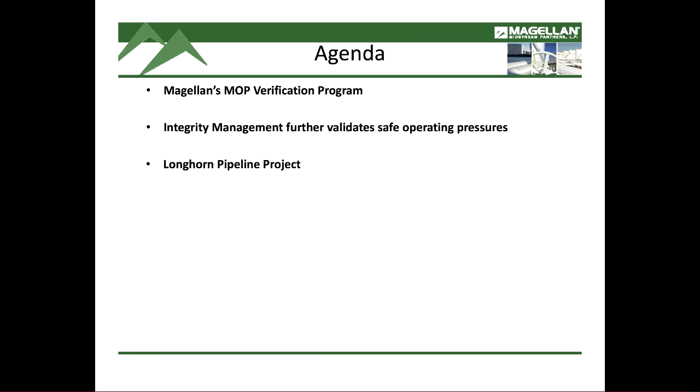This was a project where we had an established MOP, but we worked through conducting some additional verification steps to validate that the MOP we had was accurate. So, MOP verification - if you're a liquid operator in the room, you know MOP starts with 49 CFR 195.406.

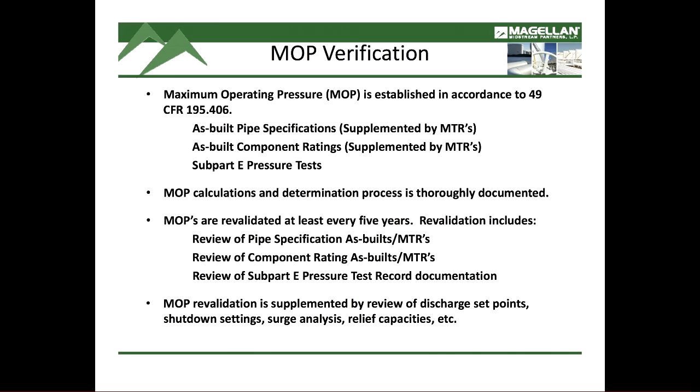For Magellan, years ago when we started consolidating our MOPs, it really started with our as-built documentation. So what we did is we started going through all of our records and pulling out the unique vintages of pipe that we had. By vintage, I mean each combination of wall thickness, grade, seam type, manufacturer, and documenting that in a concise form. All of our MOPs, we started calculating on one form, so we had a quick, concise record of all the pipe that was a part of that pipeline system.

And then, of course, we supplemented that with components - where are they at, what are they rated for, what type of component it is. And all that was rolled up into what ultimately became our compliance subpart E pressure test.

For us at Magellan, the pressure test is significant in terms of establishing that MOP, because that's the one verification that really touches every foot of that pipe, as opposed to maybe some tighter statistical sampling that you do. So the pressure test is really the driver for how we establish MOP. I think it's really critical, when you've calculated this MOP, that documentation matters.

Because it rolls out into so many other important factors within your programs. It's not just where you set your MOP, but it's also your operating pressures as far as discharge, shutdown, your assumptions that go into your surge analysis, your relief set points, and even your MOP alarms that you're using in your SCADA system, so you can ensure that you're operating below the allowable limits.

So we want to be able to step back - let's say you go to that alarm that's in your SCADA system, and you want to know how you derived it - you want to be able to go back and pull that documentation very quickly and have the information that supports that.

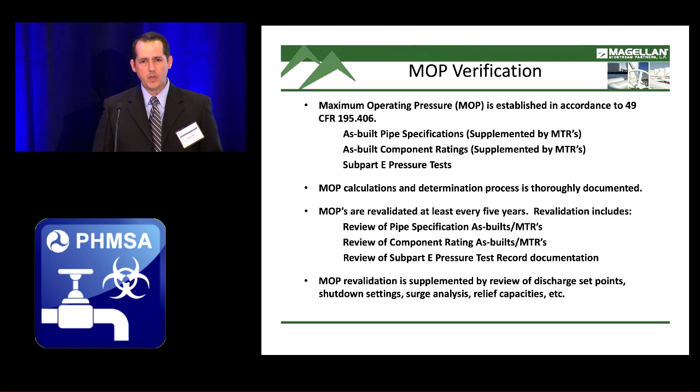You may choose to do a spike test, and that's certainly valid for certain threats. There's also a lot of questions, I think, that we talked about earlier on spike tests that we still do have to address and understand.

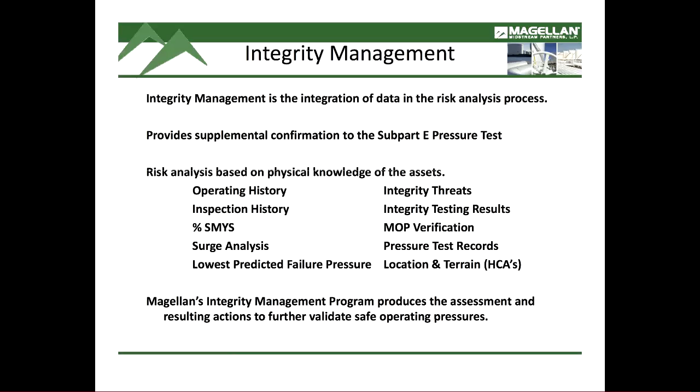Another thing you may do is adjust your MOP, or adjust your discharge pressure. One example that could impact the threat of a release at a pressure lower than your MOP is to look at your relief set points. Do you have them set at, if you have an MOP, do you have them set at 1400, or do you have them set at 600, recognizing that you normally operate at 500? So how can you influence the overall risk profile of that pipeline?

There's a lot of different decisions that come out of that integrity management program that takes a lot of integration of good quality data. And it does still come back to data, because you're only as good as the data you have. So you want to be able to integrate that and have it accessible and make the decisions you want to execute on your pipeline after that.

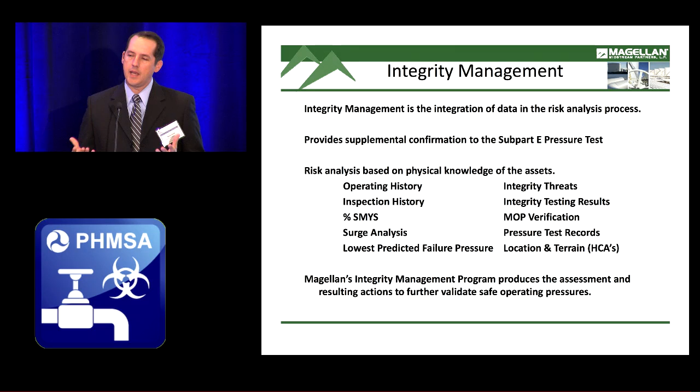So let's talk about our Longhorn Pipeline project. This was a 500-mile crude project going from Crane, Texas to Houston, Texas. It is a 1950s vintage asset, so given that, as you might imagine, not every MTR was readily accessible. But what we did have is really good as-built documentation on it, and we also had a fairly recent pressure test. It was a 1.25 MOP, 8-hour continuous pressure test.

Now this pipeline had a very specific permit approval process that went along with it, and we had very good, productive, collaborative efforts with PHMSA navigating what that approval process was going to be. Fortunately for us, the pipeline was already displaced as part of the project, but what we did is we went through all the different vintages of the pipe, and where we didn't have MTRs to support the as-built record, we went and did a series of cutouts.

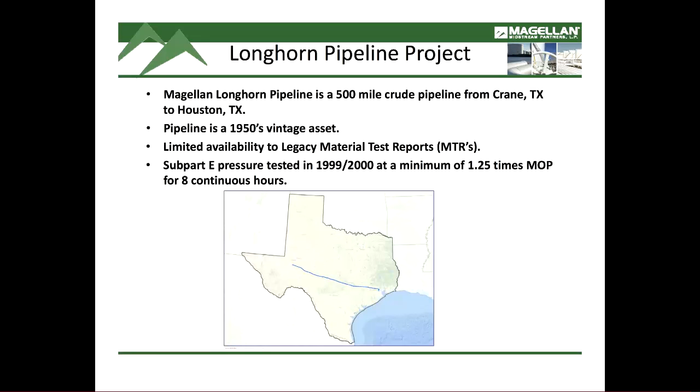Those cutouts we sent in for destructive testing, and we supplemented the destructive testing by doing some non-destructive testing on those exact same cutouts. The objective of doing the non-destructive testing is over time to continue to build a statistical sample. You obviously start with a very small statistical sample as far as cutouts go, and you're building towards that to continue to validate what your pressure test has told you.

Ultimately, the MOP was established by the pressure test, but we want to make sure that the non-destructive testing or the destructive testing validated that. And the end result is that it was. The non-destructive testing and the destructive testing results were very close to each other, probably about 10% difference when you're looking at yield strength and tensile strength.

And you know, what that allowed us to do as we set up long-term additional non-destructive testing is have high confidence that it was going to be fairly accurate. Part of the permit approval process was committing to continue non-destructive testing on 50% of our ILI features. As we've progressed, it's been a couple years now, and all the testing we've done has continued to validate that our as-built records were correct, and that our MOP and the assumptions that went into our MOP were valid.

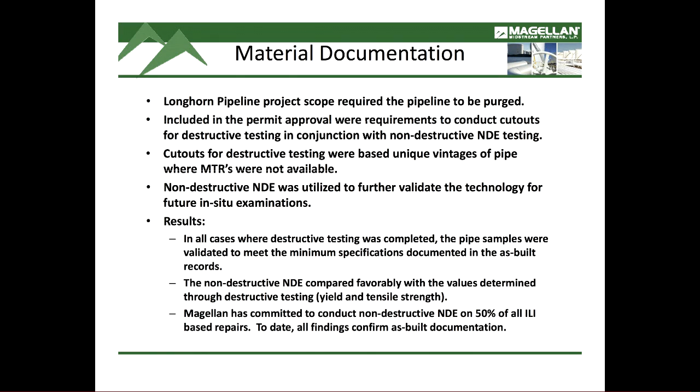So just quick wrap up, for us, the hydro test is still where we start in our MOP determination. It's a verification that covers the entire asset. The second step is that continuous review of your as-built records. Go back through those, look for data changes that may have happened, validate if you've had a management change that's occurred between the last time you validated your MOP, and make sure that's been appropriately accounted for.

And then I think where a lot of us operators are today is continuing to research the MTR records. If you're looking for what you don't know, part of digging into those records is finding the MTRs, which is where we're at. But there's also another opportunity, whether you have MTRs or not, which is to take advantage of the cutouts you're already doing.

If you're doing a relocation or a tie-in or some project where you're going to be cutting out pipe, it's a great opportunity to continue to build your statistical sampling of that specific asset and validate the records you already have. Then you can continue to supplement your MOP verification with your IMP.

Look at where you're operating, look at how you set your MOP. I'd say even take that further to relief set points, your surge analysis assumptions, and determine if you want to operate lower. There's a lot of different ways you can approach integrity management. Like I said, you may decide that a spike test is the best option. It really just depends on the asset.

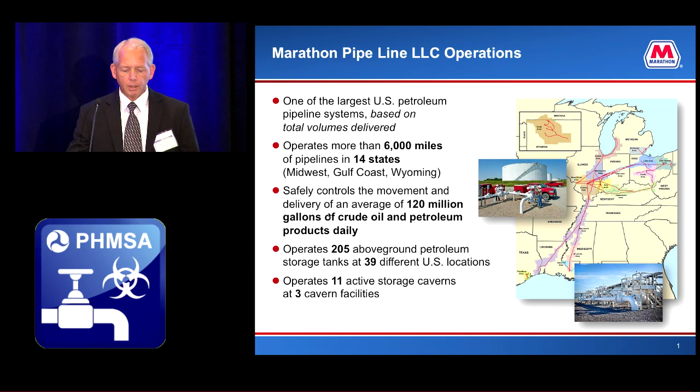First from PHMSA, I found their mission and vision statement on the website. Our mission is to protect people and the environment from the risks of hazardous materials transportation, and our vision is that no harm results from hazardous material transportation. Pretty hard to take exception to that. I think that's well stated.

Now let's take a look at the shared pipeline safety principles that are documented in the 2015 API AOPL Annual Liquids Pipeline Safety Performance Report and Strategic Plan.

Zero incidents. We've heard that several times today, and it stands prominently at the top. Pipeline operators do have the mindset that every incident is preventable, and we work very hard each and every day to try to achieve that.

Organization-wide commitment to safety. It's not just the leaders at the top of our organizations. It's a culture that needs to permeate all the way down to the frontline worker, and where we have a continuous improvement mindset that resonates throughout the organization.

Learning from experience. Operators, of course, learn from their own experiences, but we actively share lessons learned amongst ourselves, and we have a variety of forums that we have in place to accomplish that. As we continue to drive our incidents lower and lower, we need to look to the pool of operators to see what's learning, why are these incidents causing, get to the root cause. That's where we can really learn and benefit from our sharing.

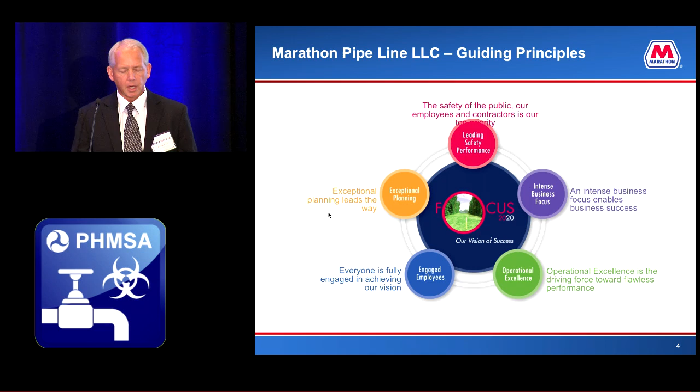So I just wanted to go through those to reinforce the point that there is clear alignment of our objectives, and that PHMSA, the hazardous liquid pipeline industry, Marathon Pipe Line right there with it, many of my colleagues in the audience, I'm sure, would stand tall with this as well. We have very similar aspirations, but I think what we're here to talk about is how does the proposed IVP effectively help achieve them. So with that, I'll provide some comments on various elements of the proposed IVP, starting with spike pressure testing.

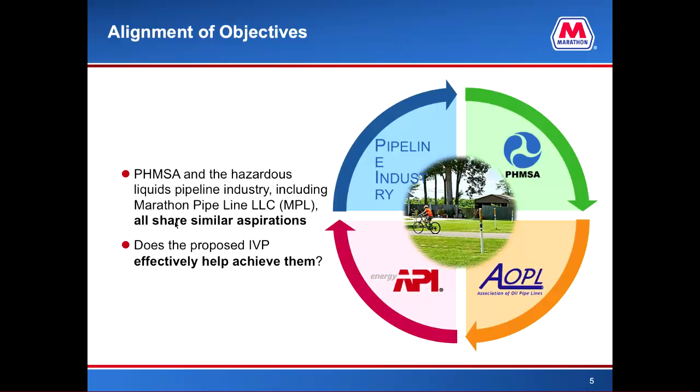So what is it? Spike pressure testing is an integrity assessment method to identify and eliminate a very particular set of critical defects, those that might be growing through pressure cyclic fatigue. It's not a tool for establishing or verifying maximum operating pressure. We already have very clear guidance in the code on how to establish or verify MOP.

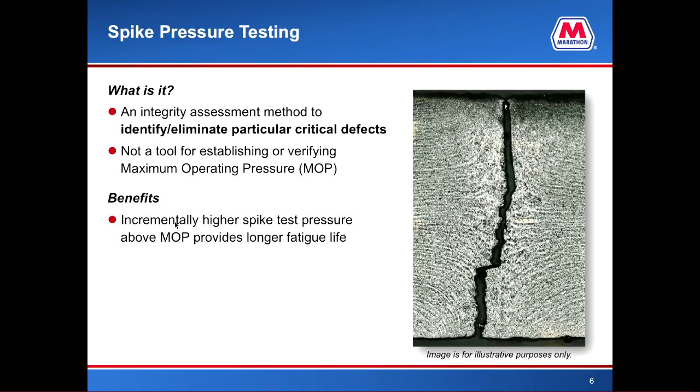Operators design spike tests with an incrementally higher pressure above their intended MOP so they have a fatigue life to work within. It's very dependent upon the operating conditions of a pipeline. If there are many, many pressure cycles, an operator would choose a higher spike test pressure to have a longer fatigue life. On the other hand, if the line was operating with very small or a few cycles, the pressure wouldn't need to be set as high. So the dependency of testing pressure at a fixed level is not really relevant. It's more thoughtful as to what fatigue life that you are targeting.

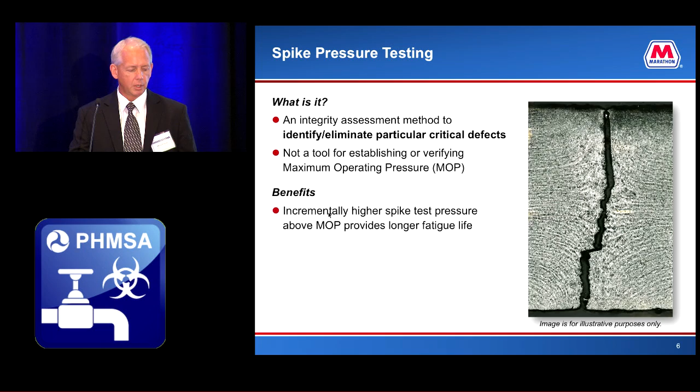There are also consequences with spike testing: damage. Hydro tests cause damage. It's a destructive test, and we're failing pieces of pipe, and we are also causing what might otherwise be stable anomalies to grow and then potentially start fatiguing. We've observed through successive pressure testing, looking at test failures under the microscope, where you can see tearing occurring during successive hydro tests - tearing, a little bit of fatiguing, tearing, a little bit of fatiguing - and what we're ultimately causing are these anomalies to fail sooner than what they would otherwise. So we've got to consider that as part of the equation here, that this test has its place, but it also has some detriment, and that we need to weigh that.

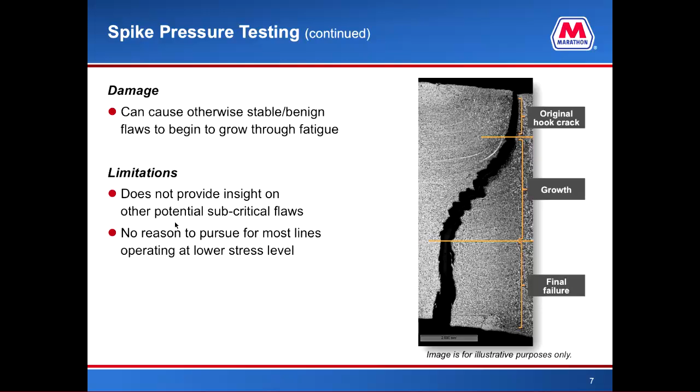Other limitations include the fact that this assessment methodology doesn't provide insight into what other anomalies might be on that particular pipeline. It will cause anomalies that have grown to a critical size to fail during the test, but there will be others that survive the test that an operator will not be able to know through this particular means. So that's another limitation.

There's really no technically defendable reason to pursue a spike test for most lines that are operating at low stress levels. If lines don't have anomalies that are fatiguing, or we have fatigue lives that are dozens, if not hundreds of years into the future, there's really no need to apply this type of assessment method to those.

It has also been suggested that operators design spike tests to pressures of 90, 100, or even a higher percentage of the specified minimum yield strength of the pipe.

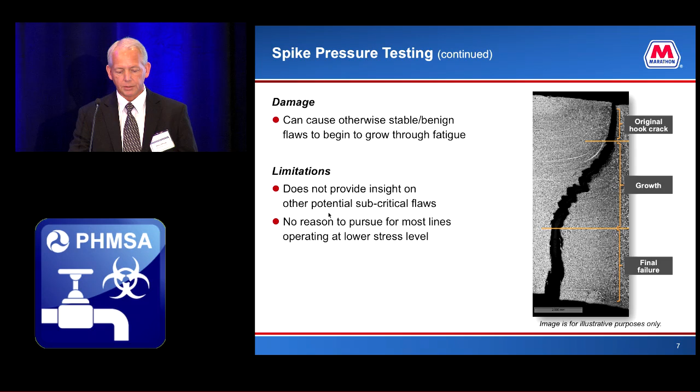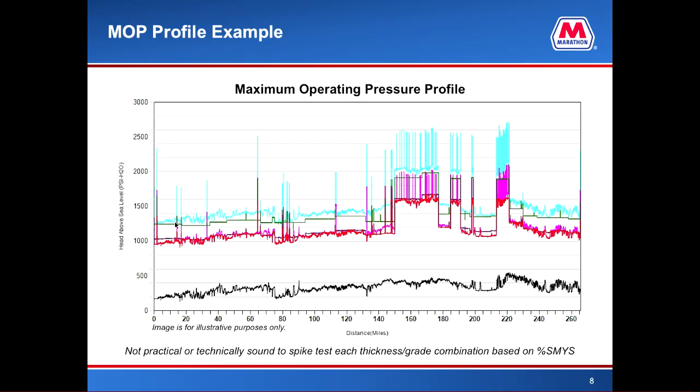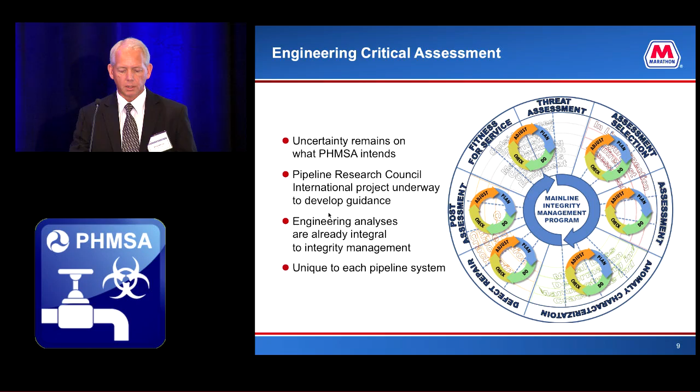graphically depicts typical steps through that process where an operator would perform a threat assessment. What do I know about my pipe? What don't I know? I select an assessment methodology to best identify those particular threats. I perform the assessment, I characterize the anomalies, I repair the defects, I evaluate post-assessment what I've learned, what I might need to change. I determine what my fitness for service is, and then I start again.

And in each one of those processes, you see a little plan, do, check, adjust wheel. Each time we perform an assessment, we learn. We take that learning and apply it and improve our processes, and we help try to find all the many blind spots that might be out there and get better each time.

The other point here is that these analyses that we perform are very unique to a given pipeline system. It's not something that you can broadly apply an algorithm to and fit all the needs for a given pipeline system. It's very custom, very tailor fit.

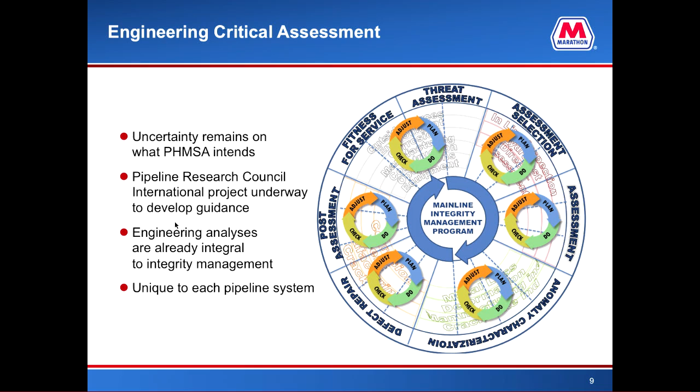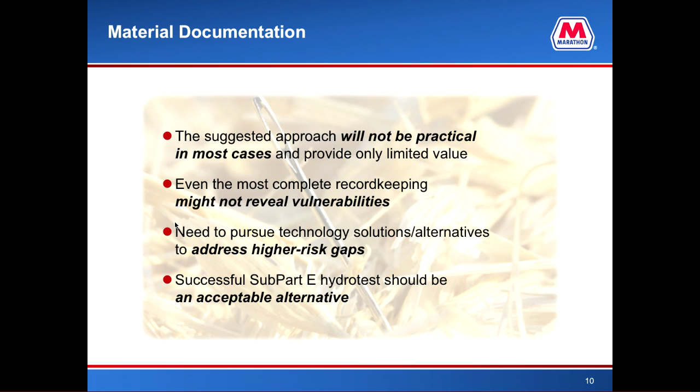So the area of focus really needs to be placed on technology solutions. Where we have gaps or weaknesses in this area, we really need to figure out what technical R&D we can perform to fill in those gaps. In fact, there are a number of projects underway to help in that regard.

And certainly a successful Subpart E hydro test, if there's a documented, thoroughly completed Subpart E hydro test, that should be an acceptable alternative to going through this exercise.

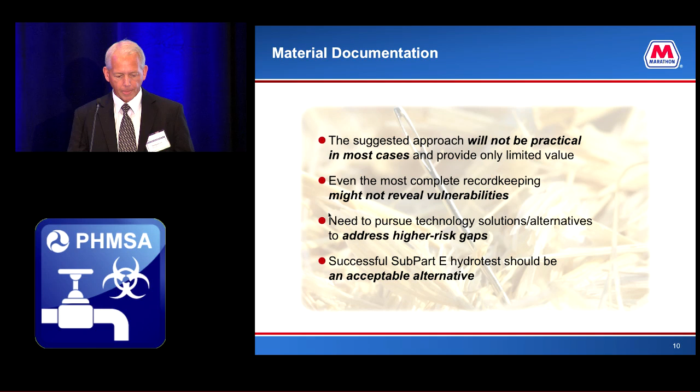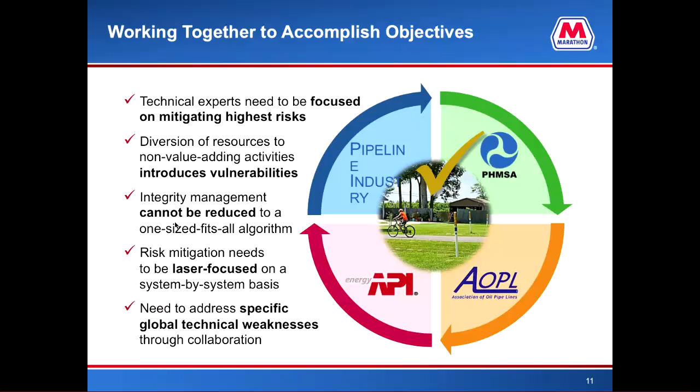Also, as I mentioned, integrity management is a complex undertaking. There's a fair amount of high-intensity engineering done on each and every segment, and we can't reduce that to a one-size-fits-all algorithm and expect it to work effectively every time.

Risk mitigation, which is really what we're trying to accomplish, needs to be laser-focused on a system-by-system basis.

And finally, where we might have global technical weaknesses within integrity management, let's work together, find what those weaknesses are, and then tailor-fit solutions—not in a shotgun manner trying to hit everything loosely, but let's laser focus our energy, find where we have weaknesses, collaborate together, and shoot towards the objectives we all aspire for.

Thank you. Questions?

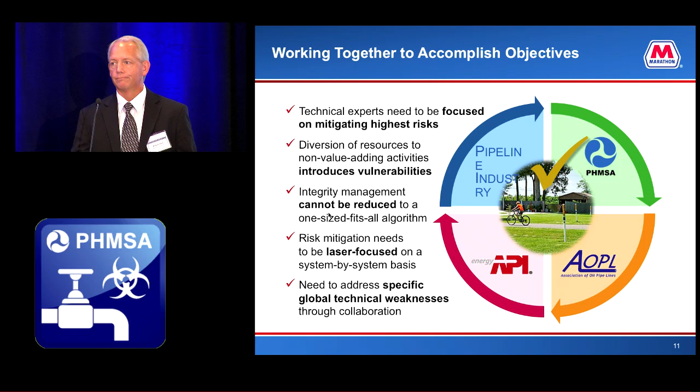Thanks, Philip. Next up is Jake. Questions already? You're done? Thanks, Jake. No. I'll let Jake expand on his background, but I know he's been around—certainly in my 8 years being with the industry and a number of operators. I think you've helped us in some of our prior workshops, so definitely active in PRCI.

So, here's Jake. So we've heard a lot today about what's in the black box. What is ECA? What are the guidelines? What are we getting ourselves into?

Speaking for a number of operators I've talked to, when we saw the first IVP charts, we asked ourselves the same question. We came together under PRCI and said, PHMSA has given us an opportunity to get ahead of this and offer some technical suggestions, some guidelines, to start putting a framework around this ECA process.

So what I'd like to do today is share with you what the PRCI project is about, where we're headed with developing these guidelines, and try to walk through some of the things that we think are important in terms of IVP and ECA, and perhaps show an example or two of how we think this might play out.

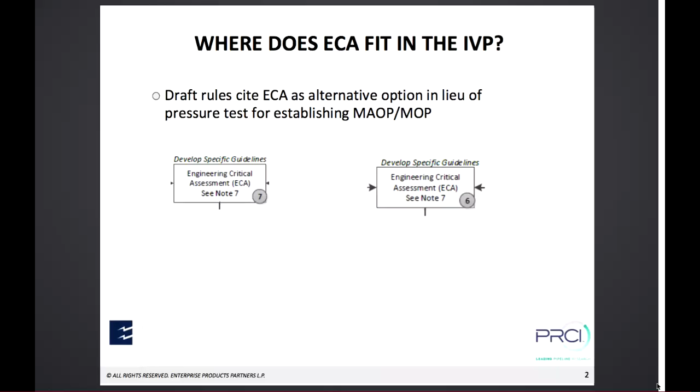But as we've all asked today, what exactly do we mean? A couple of drivers for the ECA development, particularly from the PRCI standpoint.

The industry recognizes that there are a lot of line segments out there, both in the gas and liquid industry, where it's going to be very difficult to meet IVP requirements for test records and for material documentation.

A lot of these pipelines predate any kind of regulatory code, so whether they were built to ASME standards or company standards, they may have some of these records, but not all.

We also recognize that technology is evolving pretty rapidly, particularly in ditch evaluation techniques. ILI technology is also evolving, and we want to try to leverage that in our ECA guidelines.

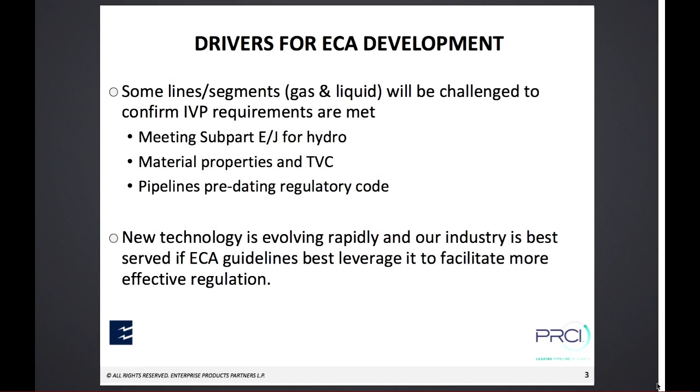So what exactly is an ECA, and what is it for? The purpose is to determine if a piece of equipment or structure is sound enough to meet the service requirements for what it is intended.

This is a pretty general definition, I believe it comes from ASME. API 1104 also has a similar definition: an analysis based on fracture mechanics principles of whether or not a given flaw is safe from brittle fracture, fatigue, creep, or plastic collapse under specific loading conditions. Now, as you all know, 1104 is a standard for girth welding.

So in this definition, the context is girth weld flaws. And of course, the IVP flow charts also offer some description of what they mean.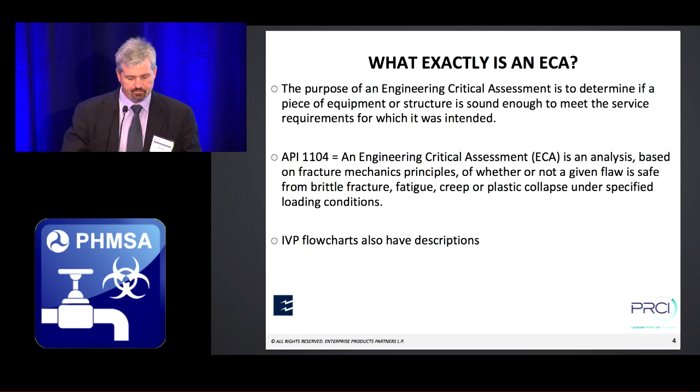The project's goal is to develop these guidelines. We want them to be flexible and practical. They need to be based on integrity principles and integrity best practices. We intend for them to be suitable for both hazardous liquids and natural gas.

We do look at this as a one-time exercise to support MOP, MAOP. When I reflect on some of the comments I heard this morning about the reoccurring nature of MOP justification, we see a blurring of the lines between the integrity verification process and integrity management program. A lot of what was talked about this morning regarding fatigue life calculation, reassessment interval determination, and fitness for purpose—that's the blocking and tackling of integrity management.

The existing integrity management programs are built around that. So we've got to figure out, and it's important to us as an industry, to understand what the difference is. If what we really are saying is that integrity management regulations aren't adequate, then let's say that. Let's come out and say we need to change integrity management program regulations.

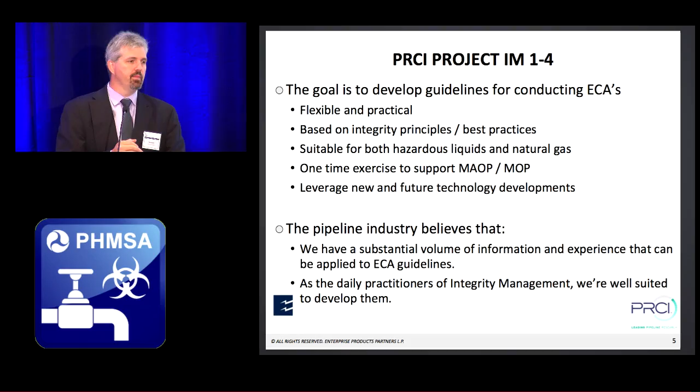Speaking for myself, not the whole PRCI team, I wonder if, rather than ECA, we shouldn't have tried to change IVP to some sort of MOP verification process—just so we're clear that we believe this to be a one-time exercise based on integrity management science, kept distinct from integrity management programs. I'll talk more about that as we go. It was kind of a revelation for me this morning, and I want to get it out there for discussion because it's that important.

We know it's the right thing to do, but it's important that we're clear on what the requirements are, so as Phil alluded to, we can focus our experts where they need to be and properly respond to these requirements. The pipeline industry believes we have a substantial volume of knowledge and experience from our integrity management programs that we can apply to an ECA process. They're closely linked, and as the practitioners of integrity management, we feel we're the best ones to come up with a guideline or framework of guidelines.

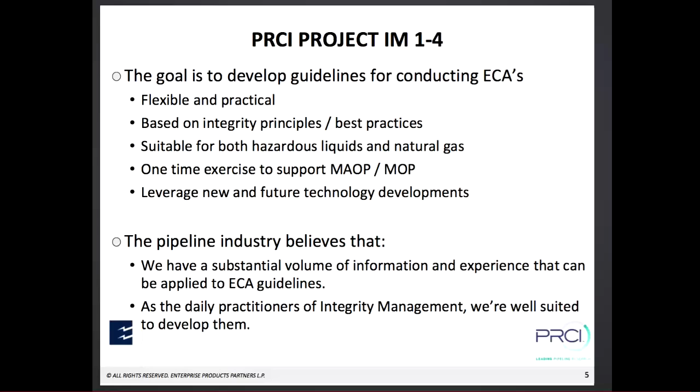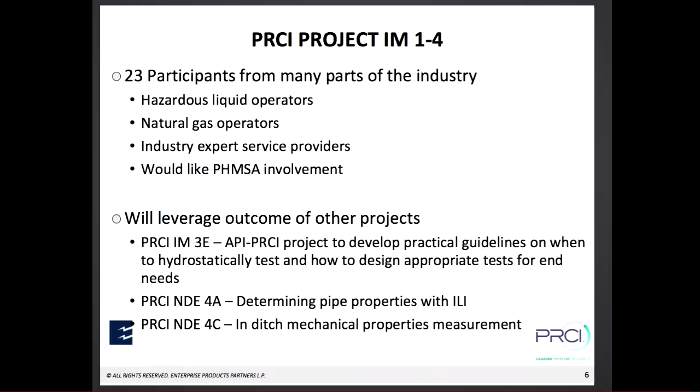The project has 23 participants. We have hazardous liquid operators, natural gas operators, and some industry experts on the team—it's not just operators. We welcome Steve's comments from this morning; they're very interested in what this project comes up with. We'd love their involvement and feedback as we go—can we fully understand and hit the mark on what they want for IVP?

We plan on leveraging several other PRCI projects. There's a project underway right now to develop guidelines for when to do hydrostatic testing and to what level, based on appropriate need. There are also several projects dealing with in-ditch materials characterization, and a project on how to connect the dots of all the in-ditch work with ILI data. We think—not to jump ahead of something I want to cover later—that's an opportunity for this PRCI project: to put these things together and consider what that means in the context of material documentation.

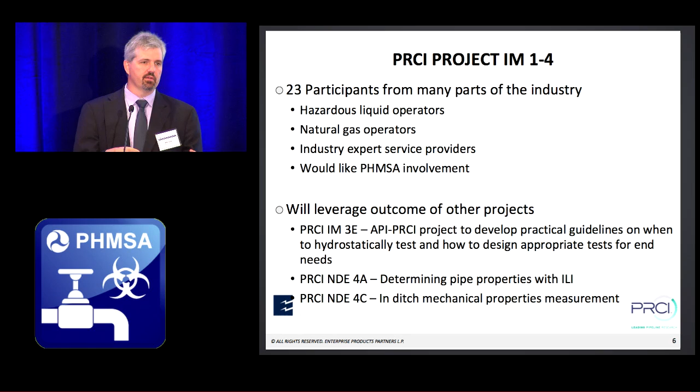I mentioned this earlier—what's in a name, ECA versus MVA. Right now the project team likes the phrase MVA, MOP MAOP verification analysis, because it's what we expect the focus to be: we have less than perfect test records, less than perfect material documentation. What can we do to make up that gap and show that our pipelines can support these operating pressures?

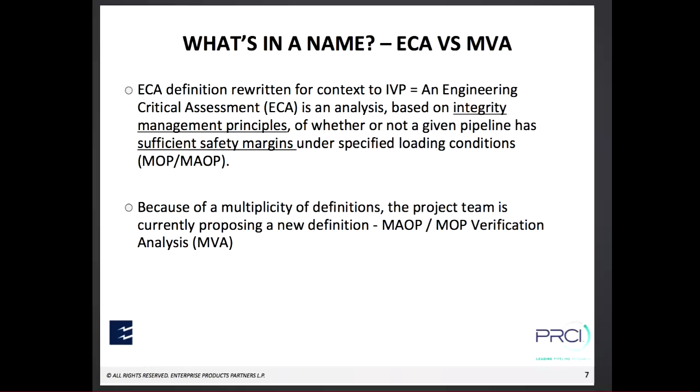We offer up a definition of ECA or MVA as an engineering critical assessment based on integrity management principles, whether or not a pipeline has sufficient safety margins under specified loading conditions. By leveraging integrity management principles, we think we can make up for not having a pressure test calibration certificate, or maybe not even having a test station location. There are things we can do from an integrity standpoint to make an equivalent safety margin to what that piece of paper would give us. I'll share an example of that later.

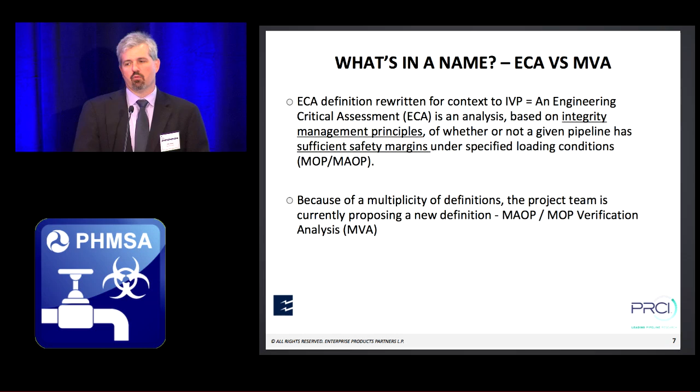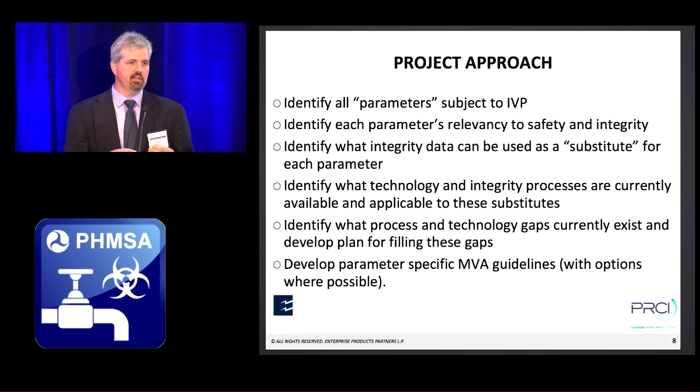Rough outline of our approach. We're calling them parameters in this presentation, meaning all the record and material record documentation requirements. Each one of those is a parameter in our language that we want to address somehow. We want to take a look at each one of those: what are the relevancy for safety and integrity? More on that in a minute.

What data is out there that we can use that's applicable to each one of these parameters? What existing technologies out there can we also use? What existing processes can be used? What kind of gaps are out there for technology and process? And then finally, we want to come up with a matrix or a table that says, if this is the thing you're missing, here are all your options to demonstrate that the pipe can be just as safe.

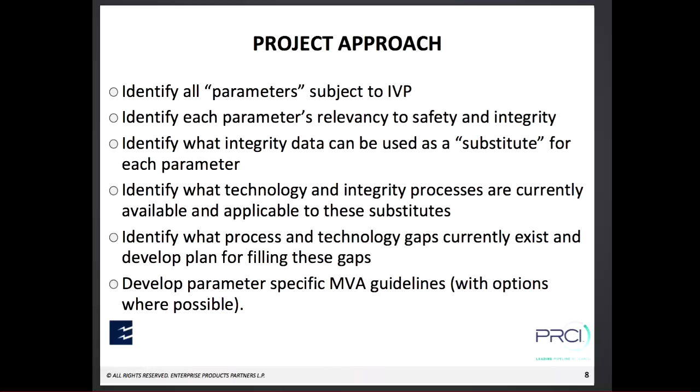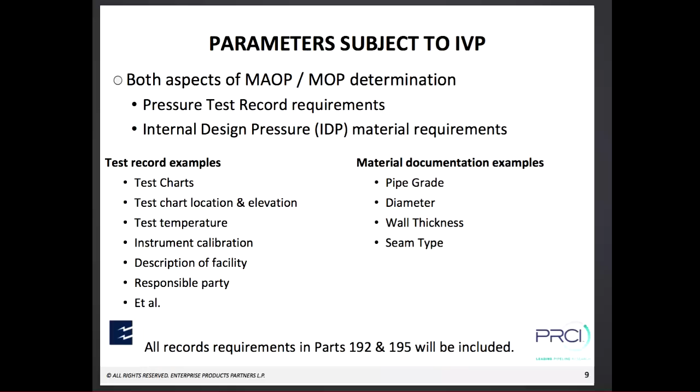As I mentioned earlier, we want to tackle pressure test record gaps, and what I've always thought of as internal design pressure material requirements: wall thickness, grade, seam type — the equation in the design section of the code that says here's what you can operate to. Some examples of what we mean are all the things listed discretely in the codes, and we intend to try to address every one of them.

Relevance to safety and integrity. We've heard some authors say one size doesn't fit all on some of these record gaps, and whether they're relevant or not kind of depends on what records you do have and the quality of the critical ones. If I have a really good test pressure chart with clear documentation, but it might not be signed by anyone, is that a real safety issue?

It's also dependent on the quality and quantity of supplemental records. Maybe I'm missing where the test stations were, but I have a watering plan, a dewatering plan, and a bunch of construction records that you can lay out in a story to say this is how the pipeline got tested — we had a section start here and a section start here, so it's probably pretty logical that would have been where the test station was. Supplemental records can build this story, and we want to see if there's an opportunity to lay down some standards or guidelines where you can use those.

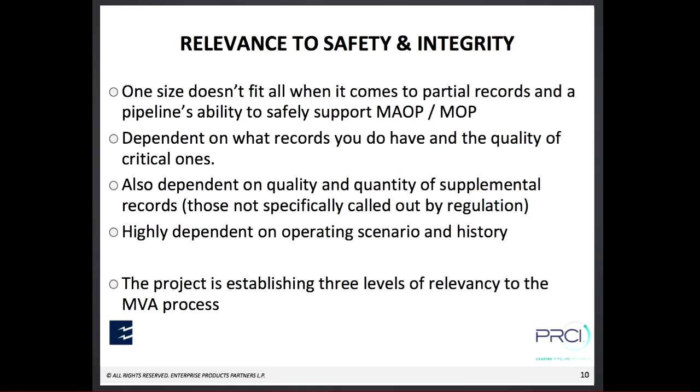A lot of this is going to be highly dependent on the operator's history and operating scenario. Phil touched on this earlier — a lot of us have pipelines that run at low pressure, 150 class systems, where the pipe's good for 1,000, 2,000 pounds because it's small diameter. Some of this has been in the ground and operating for 50, 70, in Enterprise's case over 100 years. So we've got to take that into consideration when we say we don't have a hydrostatic test record from 1924 — we've got to do something. These are important things to take into consideration.

We've established three levels. There are things that are high relevance — these are things you absolutely have to have. You need to know the pipe diameter and the wall thickness. You need to know within some range what the test pressure was.

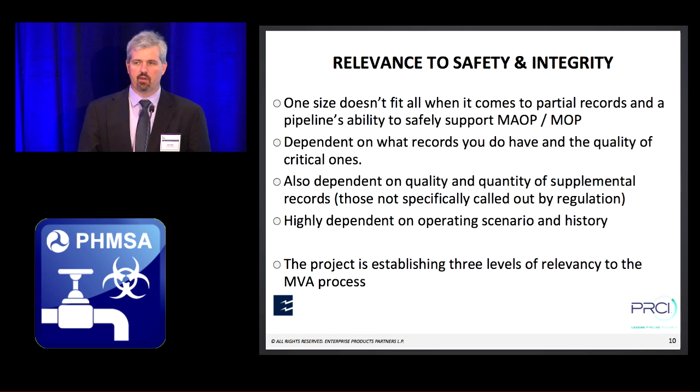We have a moderate relevance — these are things that are important, but we can make conservative assumptions about them, like pipe grade and seam type. If I don't know what my pipe grade is, I can always default to grade A, 24,000 pounds — the code gives us that option. If we don't know what the seam type is, we can always derate it down to a lower seam factor for lap weld until we can verify that, or maybe we don't need to because we don't need that kind of pressure.

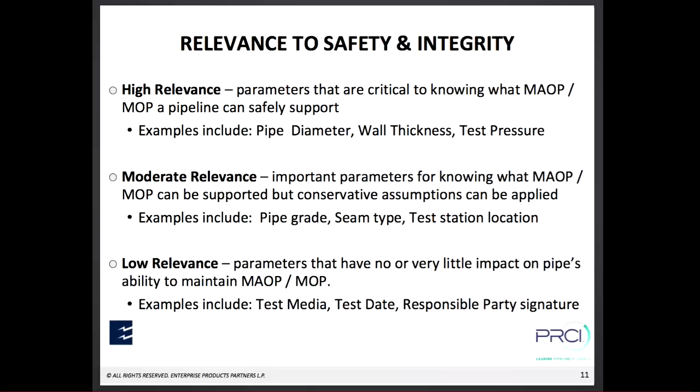Low relevance — these are parameters that have no or very little impact on the pipe's ability to maintain MAOP. We recognize these are things required by the regulations, but they still don't have a relevance for MAOP: test media, test date, responsible party signature.

Next step in our process is we're going to look at these parameters and say, okay, what integrity data can we substitute that we can analyze and apply for that gap? This needs to be done on a threat basis. If you have cracking on your pipeline, or long seam issues, the data you're going to look at is different than for metal loss and mechanical damage. We need to know the threats and risks so we can look at the right data.

We primarily believe that ILI, for reasons many have discussed today, is the primary data source. As Robert Hall indicated this morning, look for something that you don't know about. ILI gives you that. But we are willing to look at other test data too.

We think there's probably going to be some new or novel analysis techniques that may come out of this. Some things we haven't been doing with the data but are still there, or some things that maybe one operator is doing because of a specific concern, that are applicable across the board for this record gap or that record gap.

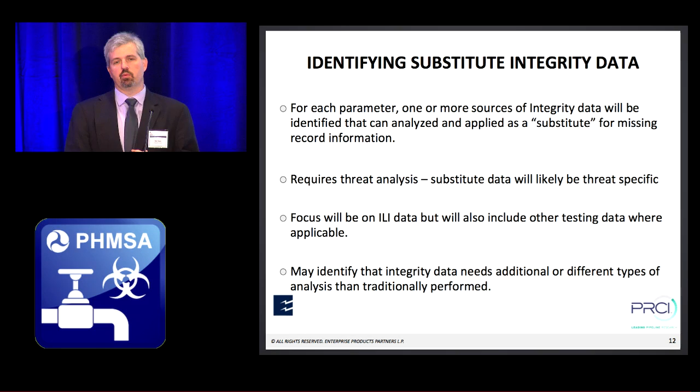A couple of processes we've identified so far that we think can be used. As I mentioned, a lot of the standard integrity management processes: threat analysis, fitness for purpose calculations, remaining life determination, repair strategy. Am I going to repair to MOP? Am I going to repair to internal design pressure? Am I going to repair to some fraction or multiplier of that? These are all basic integrity management concepts we think can be leveraged.

Liquid regulation has risk-based analysis. It's somewhat dated, and I don't know how many operators are still actively doing that, but we think there's probably some procedures or analysis that operators have done in their RBA that may have applicability today with a reevaluation of it, and how relevant it is today.

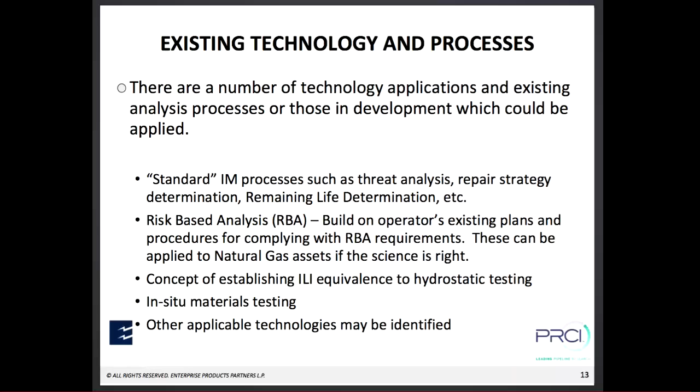A project that PRCI is working on is this concept of ILI equivalence to hydrostatic testing. This is really, we think, a big part of what these guidelines are going to be, and I'll go into that when we get into an example. Then we want to see if we can help further how in-situ materials testing can be used in a more global picture. Since we're just getting started on this project, there's probably other things we'll identify as we go too.

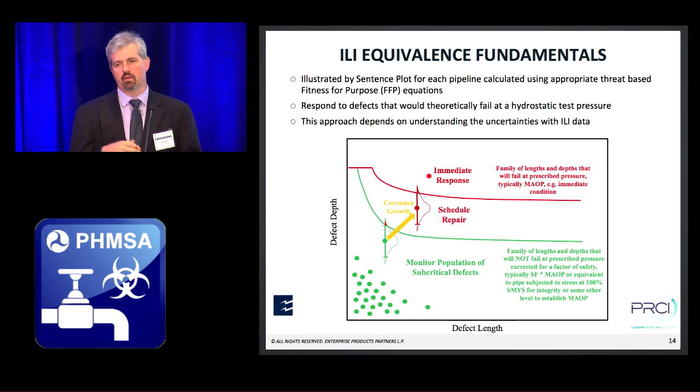Some things we'd obviously want to consider here are uncertainty in the ILI data, probability of detection, statistics, sampling methods, and all the other pieces of integrity management that you do on your ILI data to be sure you're making accurate decisions based on what the tool is giving you.

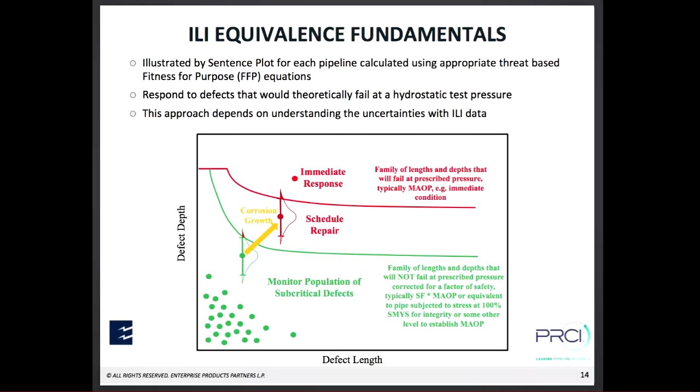Direct assessment hasn't proved to be what we hoped it would, but there's some concepts in direct assessment that I think about.

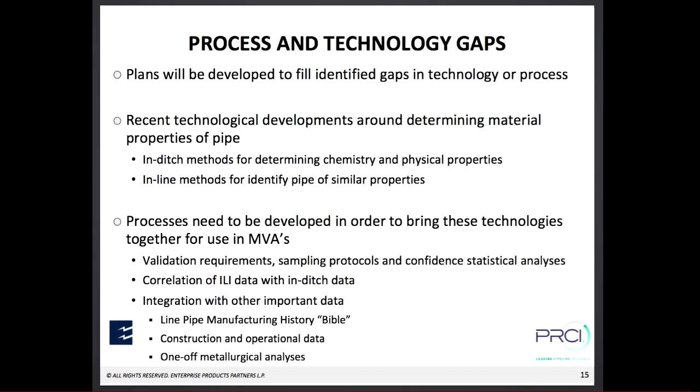How you bucket all similar pipe together. When you establish regions in the ECDA process, you say, this pipe has similar characteristics, so we're going to apply this sampling on that pipe. This pipe has these type of similar characteristics, so we're going to apply this testing on that pipe.

Some of those ideas we think might work here, to develop a protocol that says you're going to take your ILI data, look for different types of pipe, and sample each different type a certain amount. How much? Those things are things we need to work on.

There's other important data out there that's going to be part of this too. We have a very helpful document put out by ASME that documents the history of line pipe manufacturing in North America. We'd love for it to be updated, we'd love for more contribution into that because it's somewhat dated. But there's very valuable data in there that we can use to understand whether the data we're using is real or not.

There's been lots of talk about 30-inch seamless pipe that PG&E thought they had. Well, if you look at that book, you'll see it was never made.

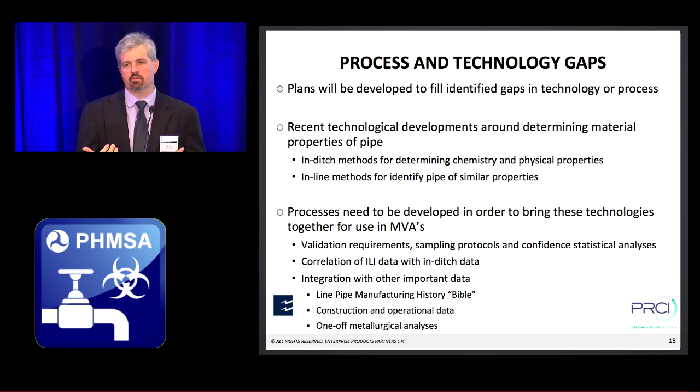We want operators to be able to look at their construction data and whatever operational data they have, and that may play a part in how we make this protocol. And then, as we have failures or we do one-off metallurgical tests, we want to pull that data in too.

And finally, we're going to develop the guidelines. We have different applicability of integrity threats, different levels of relevancy for missing records, differences in quality and quantity of supplemental records, so we've got to be flexible to account for these things.

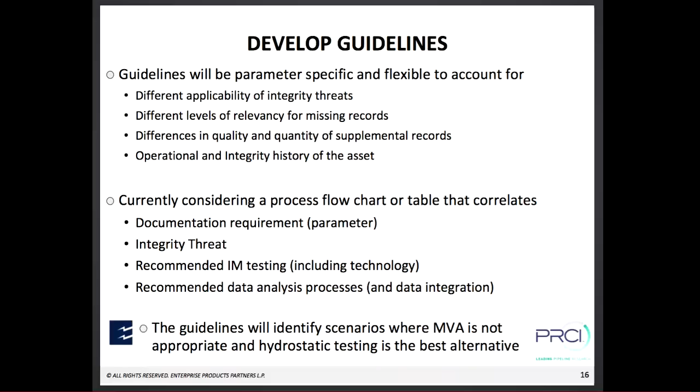Right now, we're trying to decide whether a very complicated flow chart or series of flow charts is the way to go, or maybe we need a table. As we start to assemble these pieces, we're trying to work through the actual vehicle for delivering these guidelines out. So that's kind of one of the things we're working on right now.

We're certain that we're going to identify certain scenarios where hydrostatic testing is the right way to go, and may even offer some guidance of how to conduct that test to make up for your gaps. We're not saying that we're going to be able to solve everything without testing, but we're going to try to identify where we can.

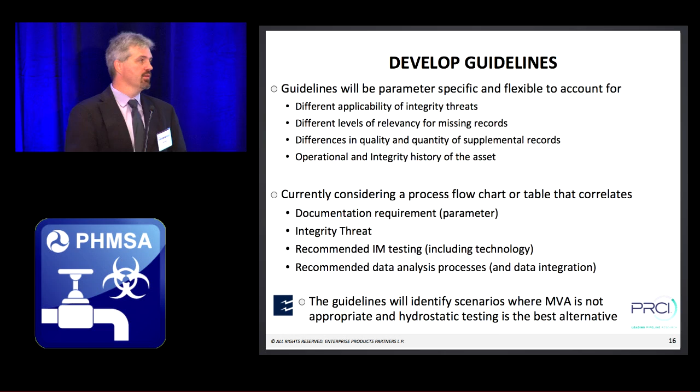So maybe an example to kind of bring this together, what we're thinking is, we have a situation where we have no calibration certificate for a hydrostatic test.

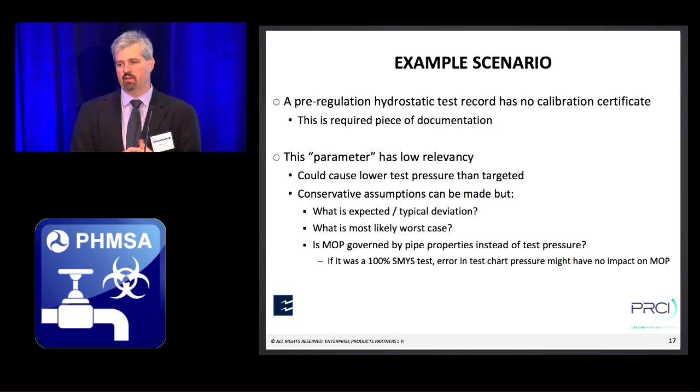We acknowledge this is a regulatory requirement, we have to have it. It was an old pre-regulation test. We don't have it. We think this is a low relevancy parameter because we can account for it.

If we think worst case, if we don't have a calibrated test station, the test pressure that the pipe saw would be lower than what our gauge is telling us. That's the worst case. But can we make a conservative assumption about how far off that test equipment may be?

Do we know what the expected deviation is, what's typical? What's the most likely worst case? Is the MOP on this particular pipeline governed by internal design, wall thickness, grade, rather than hydrostatic test pressure?

Did they test it to 100% SMYS? So if the actual hydro pressure is 10 pounds off, it doesn't actually impact MOP at all, because MOP is governed by 72% or the Barlow formula.

We think this particular example is a good candidate for the ILI equivalency approach. We think there's error in our MOP. What changes do we need to make to our ILI data analysis to make up for that?

Do we want to change our repair philosophy? Do we want to increase the repair pressure? Say this particular line, we're just repairing to 1.1 times MOP or 1.25 times MOP. Maybe we want to increase that a little bit because we think there's some error in that MOP number. Maybe we look at what tolerances we're using in the ILI data and add something there.

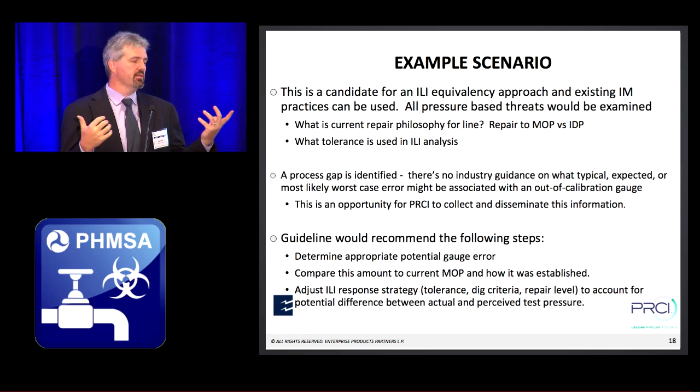To summarize, this is what our guideline might look like: determine what your potential gauge error is, compare this to your current MOP and how your MOP was established, and what impact it might have on the validity of that number. Adjust your ILI response strategy to account for that.

I want to thank Jerry Rao and Mark Piazza for helping out in this presentation and for really showing a lot of leadership on this project. That's all I have. Any questions? Thank you.

So really, is it the issue of the pressure test or the spike test in number 9? Is there something else about subpart E that's not working for us right now?